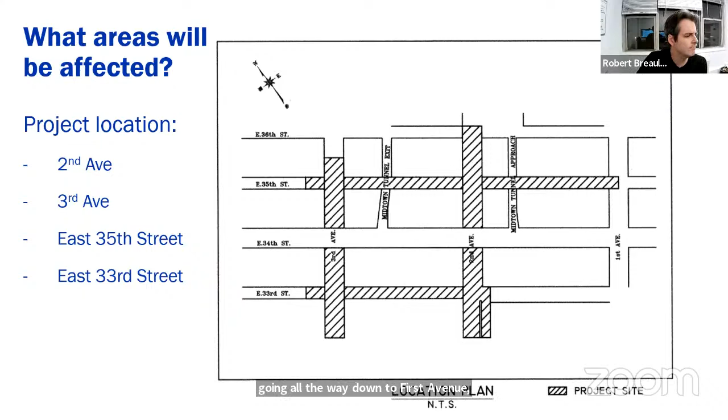All right, so how will this project benefit everyone? At the end of the job, you'll have new roadways with new fresh striping. We do extensive water main work on this project, distribution main, which is the smaller mains that service buildings, residents, and businesses, and the larger mains that take the water from the water tunnel and the shaft and then distribute it to the smaller mains, which then take the water to the buildings. We also upgrade some various private utilities along the way, electrical systems, gas systems. There's some new drainage that's been installed and will continue to be installed in the project also.

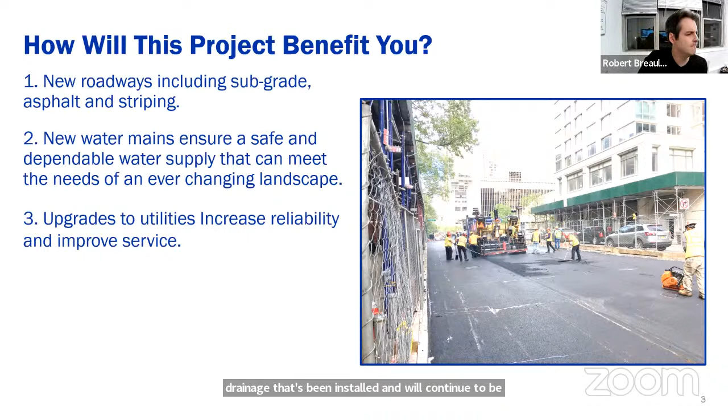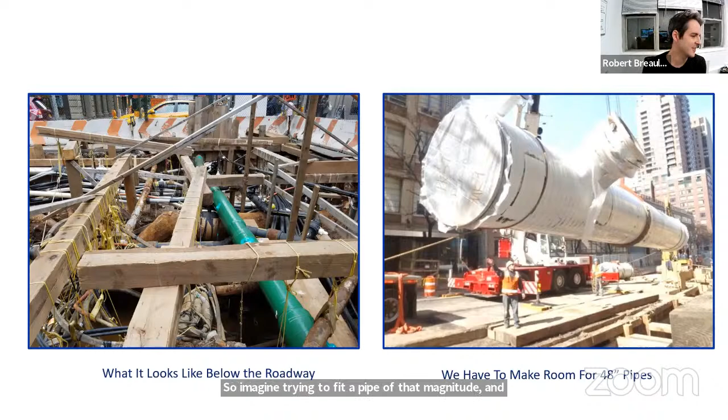All right, so this is a pretty interesting slide. The right picture is one of the largest water mains that we're going to install on the job. This picture's from another project, but it's a 48-inch diameter trunk water main. So imagine trying to fit a pipe of that magnitude into a hole that you see on the left, which is jam-packed with all types of private utilities, gas lines, electric lines, internet, fiber optics, telephone cables. So a lot goes into what we're doing out there. There's a lot of preparation, inspection, testing, and planning that goes into the final product.

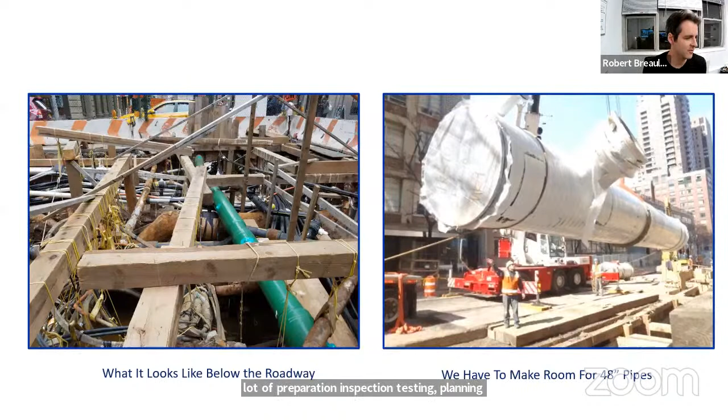All right, so how long will the job take? I'm sure this is one of the burning questions. As of right now, we anticipate the job to be done at the end of 2024. Primary reason for the job going a little longer than expected is underground utility conflicts. But through identifying the conflicts and necessary mitigation, we've developed a game plan to be able to move whatever needs to be moved out of the way to allow for the city facilities to be installed in the quickest way possible and with as little disruption to the community as possible.

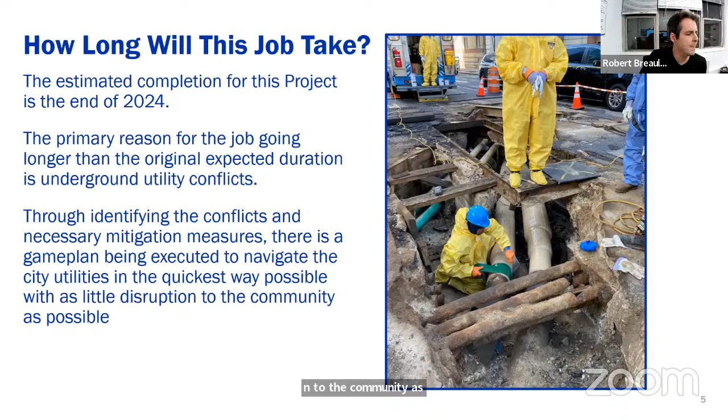I want to give everyone an update on what we're doing today, what's going on right now in the field. The most critical location of the job is East 35th Street and First Avenue. We have to install a large 48-inch water main, make a connection to an existing main running north and south at that intersection. Bringing this large pipe across the street, it has to cross many private utilities that are in the way.

Currently, we're working on a transmission main. It had a shell or encasement around it that had to be removed to create the necessary clearance for the main. We've done that. Now we're just doing some restoration work. This photo shows some retaping of the main. 95% of this work is done, and we should be done within a few weeks.

Once that's done, we're going to move to the next step, steam main relocation work. This is definitely the largest and most extensive work at this intersection. But we've discussed this with the contractor, and they're going to have one dedicated crew nonstop at this location. As soon as one thing is done, they'll jump into the next mitigation work. There's going to be no lapses in time, no delays. It's going to be continuous work at this location, which is the most efficient way to do it.

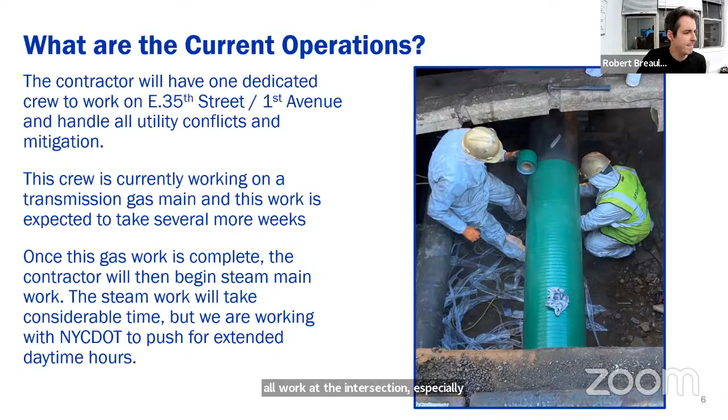Also today, we started the trunk water main, 48-inch trunk water main work on 35th Street between 1st and 2nd Avenue. As you can see in the photo on the left, we set up the MPT, maintenance and protection of traffic. We set up our work area. The barrier is separating the work zone from the traffic. There's going to be a traffic lane on the south side of the street, and all the work is going to be performed on the north side of the street.

We coordinated with various agencies to get all this work underway, including the Parks Department. The picture on the right is St. Vartan Park along 2nd Avenue at 36th Street. In order to keep handicap access to the park, we created an entryway through the 12-foot fencing. This is necessary because part of our work scope involves closing the main entrance on 35th between 2nd Avenue and the Queens Midtown Tunnel approach.

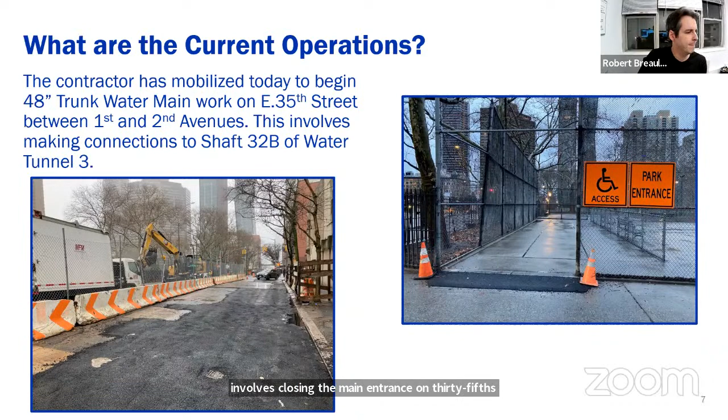We should talk about some storage areas. Luckily, in the last year or so, we've reduced the footprint of storage. Part of this was due to finishing all work on 33rd Street between 2nd and 3rd Avenue. We had a storage area on the 33rd Street northwest corner, and also one on the northeast corner of 3rd Avenue and 33rd Street. Both of those have been removed to allow for the work to be complete, so that block is completely done.

So we only really have 2 storage areas now. In fact, part of starting the trunk main work I showed in the previous slide, we had some storage on that street too, 35th Street between the tunnel approach and 2nd, and that's all gone. So there are only 2 storage areas left, 33rd Street and 2nd, and 36th Street between 1st and 2nd.

We tried to work with the contractor to minimize these impacts. 33rd Street and 2nd, they're going to keep until all major work is done. Once all the water main work is done and there's minor completion work remaining, that storage area will be gone. But we're going to most likely maintain the 36th Street storage for the duration of the project.

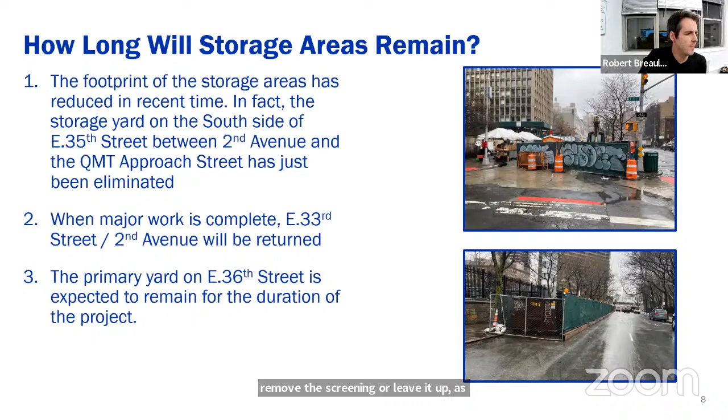All right, so tree guards. This often comes up in community comments, concerns about the tree guards, how they're being maintained, why they're in place. So tree guards need to be in place and maintained the entire project lifespan.

This is a Parks Department specification. So even if some people outside will see tree guards in a place where they haven't seen active work for months or even years and wonder why they're still up, they have to be. In short, they have to be up. We really have no say in that.

Now, on this job, the 33rd Street location that I mentioned, we worked with the contractor to remove them. They didn't need to do that because technically they're taking on responsibility should anything happen to any of the trees on that street. But we worked with them to take them down, especially since it's a street with a school. So we were able to remove those, but the remaining tree guards will have to stay up.

What we can do is make sure we're maintaining them. Unfortunately, people tend to throw garbage in them. Sometimes they get hit and they become a little disheveled and some pieces fall off. So we do work with the contractor, who routinely maintains them. So if something's in bad shape, they'll...

Reinforce it. If someone graffitis or marks them, they can paint over them. If garbage is thrown inside, they can rid the pits of garbage. They've actually even brought topsoil at times if there's some soil erosion going on inside the pit. So that's what we're going to try to do, maintain it as best as we can to keep them in tip-top shape. But we unfortunately do need to keep them in place for the duration of the project.

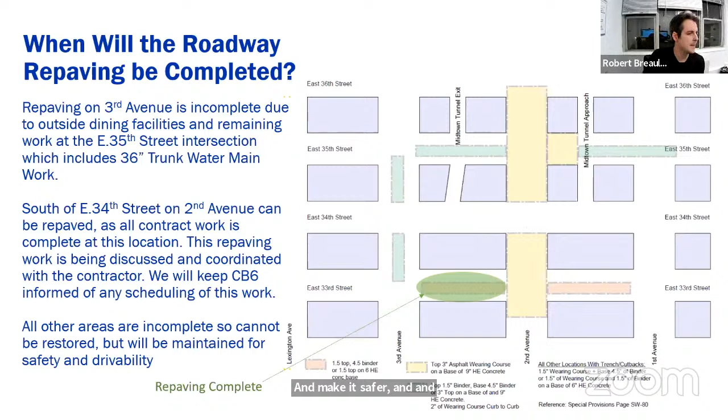Okay, so this location here, 35th Street between 2nd and 3rd. Like I had mentioned before, we still have to do a large water main, a 36-inch diameter water main on the street. But similar to First Avenue, where we have many utility conflicts, we have them here also.

So the contractor is working only on weekends, which is a little unfortunate. The permits only allow us to work because of the congestion and the tunnel exit street. We can only work on the street on weekends. So the contractor's been working weekends for a year plus, maybe two years plus at this location. It's slow going because we can only work two days a week, but we're doing everything we can to eliminate the steam conflicts to allow for the water main to be installed. We estimate now that the water main work will begin at the end of this year.

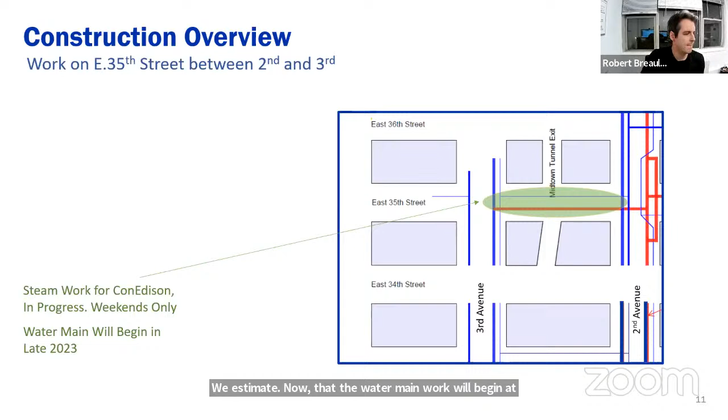All right, 35th Street between 2nd and 3rd Avenue. I showed some pictures earlier of the MPT setup and the park entrance. This is where the trunk water main work has just begun today. So they set up the zone, they set up the MPT. They're going to begin digging later this week.

This is pretty complicated work. We have a lot of connections. We have to connect to the shaft. We have many appurtenances and chambers. And not to get into too many specifics, but this is considerable work here that we estimate will take roughly six months. Now, we're not going to be able to bring the pipe all the way down to First.

We're going to come up short because we have all that mitigation work that we still need to complete. So we'll bring the pipe as far as we can, put a temporary cap on it. And then later on, when all the work is complete, the First Avenue and the lane is ready, then we'll complete the installation into First Avenue.

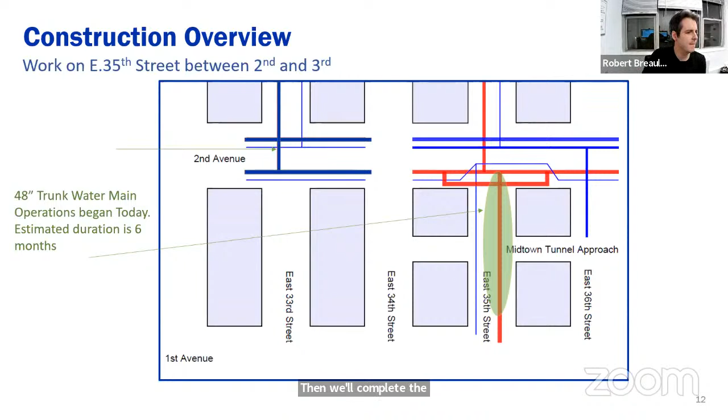And here's First Avenue, like we discussed, East 35th and First. This is where the major utility conflict work is ongoing. The transmission gas main work has only a few weeks remaining. Steam work will follow that, but there's also electric work that needs to be done here, high pressure gas work that needs to be done here, some sewer work that needs to be done here, all to allow for the large water main work to take place.

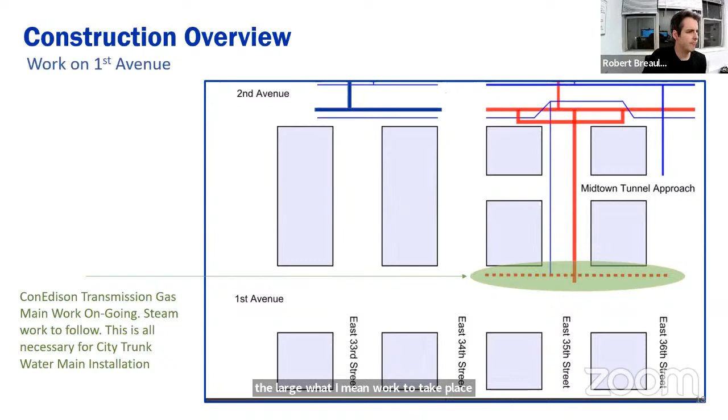All right, so community outreach. DDC's Office of Community Outreach and Notification works with community boards, business improvement districts, local businesses impacted by construction. Karen, who introduced herself earlier, is the Project CCL. She works with VRX, which is a sub to my company, Greeley and Hanson. We're the prime consultant on the job, and she's the dedicated on-site community construction liaison. And here's her information, email and phone number below.

And that's it. So see if anyone has questions. Great, thank you. And I have one, just so the committee knows, when was this project started? 2018.

My question is, if I understand correctly, you said that you're ready to repave 2nd Avenue below 34th Street. But isn't there a storage area right there at 2nd Avenue between 34th and 33rd? Yes, there's a storage area over there, yes. Can you repave around that? Or like what happened? Yeah, we might have to make adjustments to that if we're gonna do that. Okay. I mean, the reason I'm asking is that's a high volume bike lane stretch, which is already kind of a mess. And you know, I would love to see that repaved as soon as possible. I'm just sort of praying that you could go around the storage.

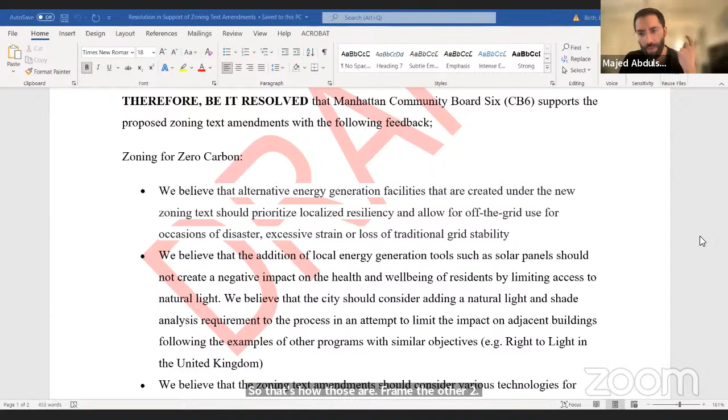The other two, I'll just mention, and others please jump in after. We talked about zoning for zero carbon. There's zoning for economic development, which is really just some changes in eligibility for what kind of stores and businesses can open.

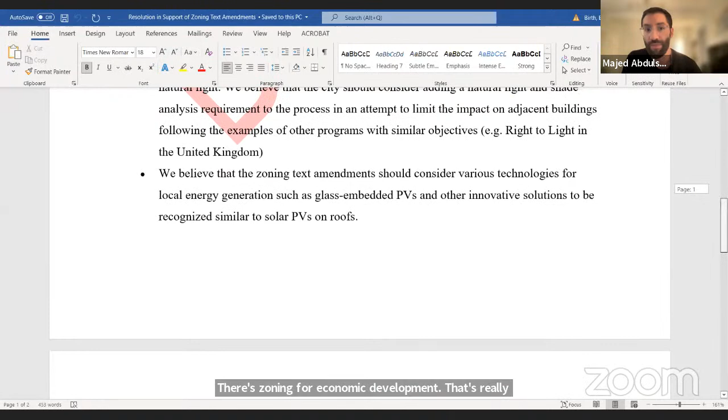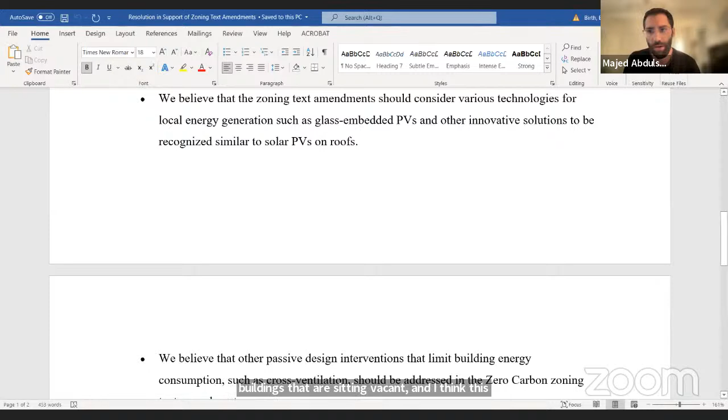And there's zoning for housing. At the heart of that is allowing, among smaller things, commercial and office buildings to transform their use to residential - not newly constructed ones, or at least that's what we're hoping. So one of our questions is, how are you making sure this is not a loophole? Living where we all live, I'm in Midtown, and there's an abundance of office buildings sitting vacant. I think this could drastically increase the number of residential units in the area, addressing the housing crisis we have. So I'll stop here, and I see Jim has a question.

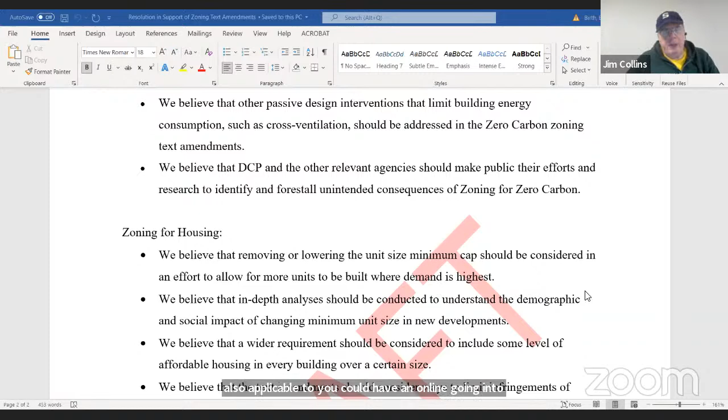Yeah, hi. I just wanted to confirm something with respect to having electricity available offline, and I wanted to ensure that was also applicable - you could have it online going into the grid as well as independent of the grid. Is that correct?

Yeah, so sorry, your voice broke up at the beginning, but from what I understand, the idea is that eventually landlords set this up on their building and can sell back to the grid. Nowhere in the zoning text does it say they are required to use it locally in case the building is for any reason disconnected from the network, and that's what we're asking about.

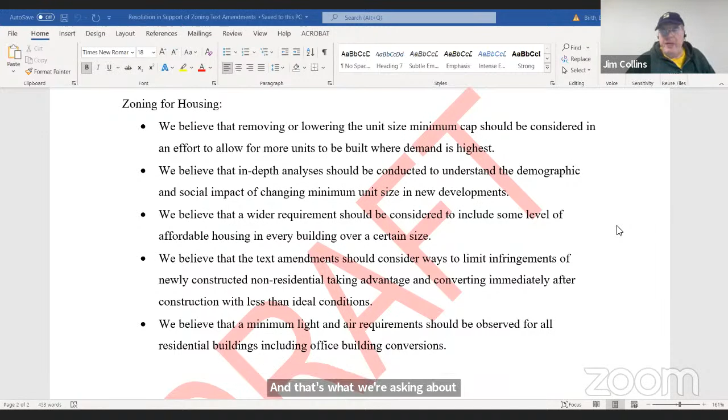Okay, so it would also operate independently then, correct? In principle, it can. It's not mandated. We hope that they add a mandate for that.

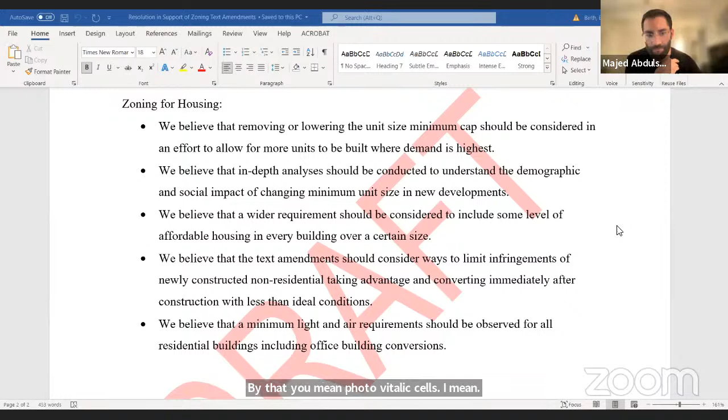Okay, and the other question was, you make reference to PV - by that you mean photovoltaic cells, I imagine? Yes, that's correct. Is that spelled out in the resolution? You might want to - I think I spelled it the first time I mentioned it, but if not, did you?

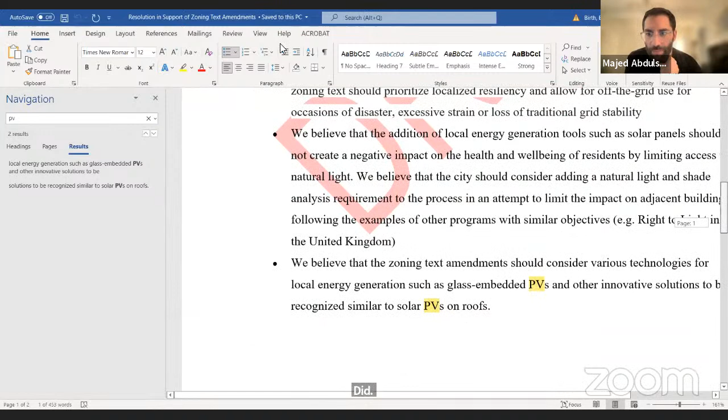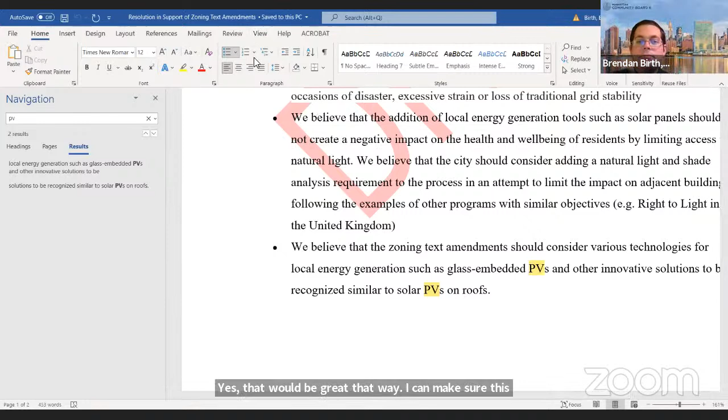Okay, go back. Did I? Okay, if not, Brendan, maybe if you're able to edit it, update that, since it doesn't impact the content. So could you say again what it is? I'll put it in the chat, actually. Yes, that would be great. That way I can make sure the stuff is correct as well. That'll stop a question at the full board.

Thank you. Susan has her hand raised.

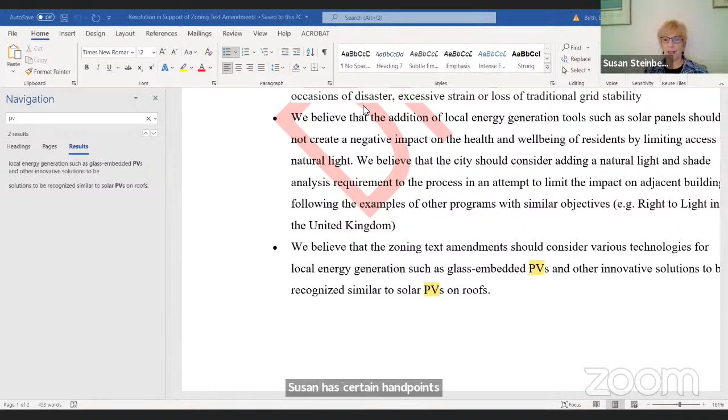Yeah, I have a couple of questions, and if my questions are annoying because I'm new, let me know and I'll shut up. But there's this huge rush to become all electrified, and I just keep thinking of these horrendous situations with climate disasters where millions of people are left without power, and I just am making that comment. I mean, I don't know what alternative we have that could be cleaner, but it just worries me.

That was number one. Number two, in terms of converting offices to residential facilities, it requires a lot of other infrastructure to really make it work - groceries, pharmacies, schools, hospitals, doctors' offices. So it's not just a matter of additional housing, it's everything that goes with it to make a neighborhood. All right, I'll shut up. No, I'll just say that's helpful.

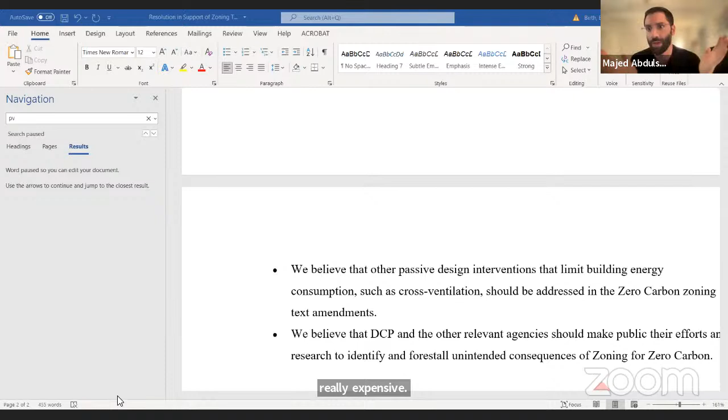Susan, to your comment about the PVs, we even added a question about the new technology for types of glass that have PVs embedded in them. Now you don't see them everywhere because they're still really expensive, but this is where a zoning text amendment makes it worth it for a developer to look at that more seriously, especially with all the glass towers we have. So we have that as one of the points.

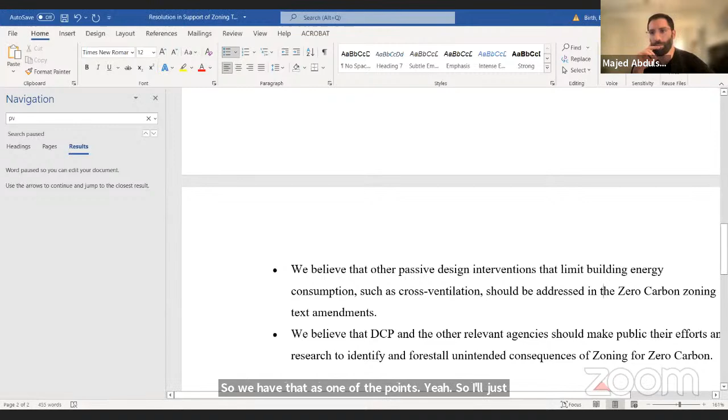Yeah, so I'll just comment on that. And I think, Susan, you're absolutely right about needing neighborhood facilities. If we do increase housing, that's really a much larger issue the city will have to address if we increase the residential density in our neighborhoods. I think there are probably lots of areas in New York that are underbuilt. And I don't know if we address that in this - the multiple dwelling, I think it's at 12 FAR, our maximum right now. So some of the things being converted would be more than 12, which definitely does increase density. I don't know if we have a position on that, if that's something we want to add into our review here.

I'll add to that, Sandy, that the one reference we did is that the zoning text amendments do not address light and air requirements for access for conversions, which, if you're building a residential building, you have very strict requirements. Office is a little different, but now if that office building becomes residential, how do they go about it? So one of our comments is also about that.

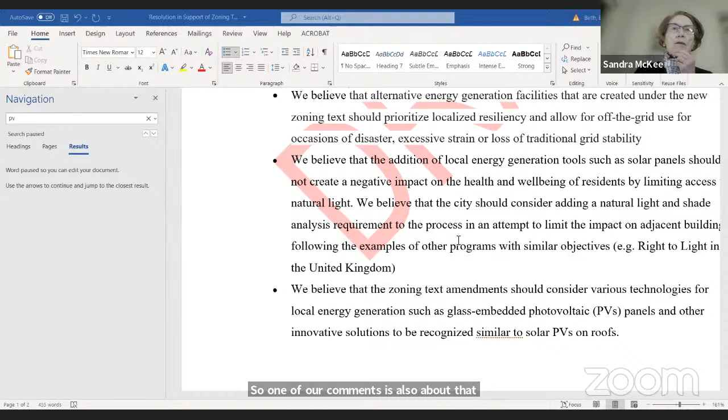Yeah, I mean, personally, I'm for maximizing density to the extent possible, especially within Midtown Manhattan. I think it's truthfully great. But just a technical question: was this emailed to us at all beforehand? I know I saw the solar one reso this afternoon, but I'm not sure if I saw this in my inbox.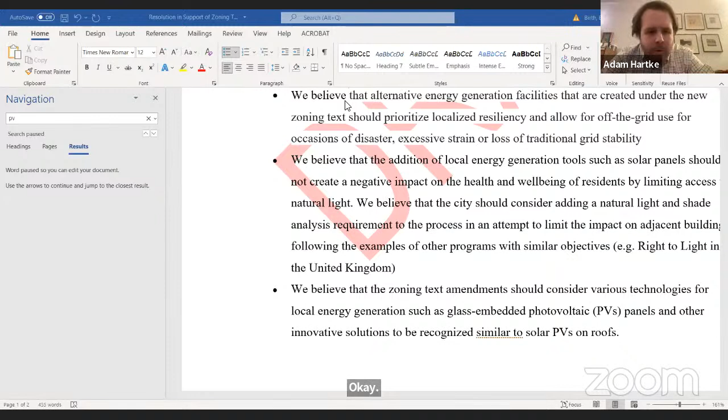No, it was not. We didn't have it in time. Would you mind? I saw the housing thing, so I've just been reading along. Would you just mind scrolling down to there? Just wanted to just read this. So thanks.

Yeah, and I'll only add that to the density point. We included a question about the size cap. So units are capped at 680 square foot minimum for new construction. There are a number of details, and that number has been brought down over the years. Now, when you can build smaller units, you can build more units because you are restricted by area, but up to a limit.

So 2 points we asked. First, has the city, specifically DCP, done any analysis on the demographic and socioeconomic impact of having smaller units and what that means? And the other was that we are in favor of removing the cap or lowering the unit size minimum cap per the findings of whatever studies they have.

I have to assume, I worked for a little bit for DCP, so I have to assume at least some analysis has been done, even if it's not made public. There's no analysis that's public that I can see, and maybe there isn't. I just missed it. If somebody knows, let me know. But that's one of the things we're asking.

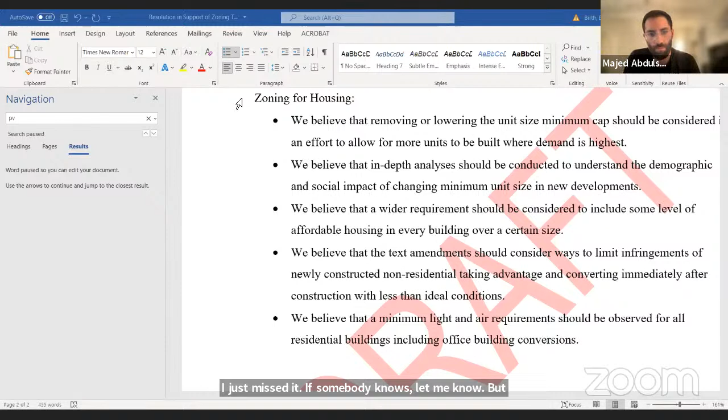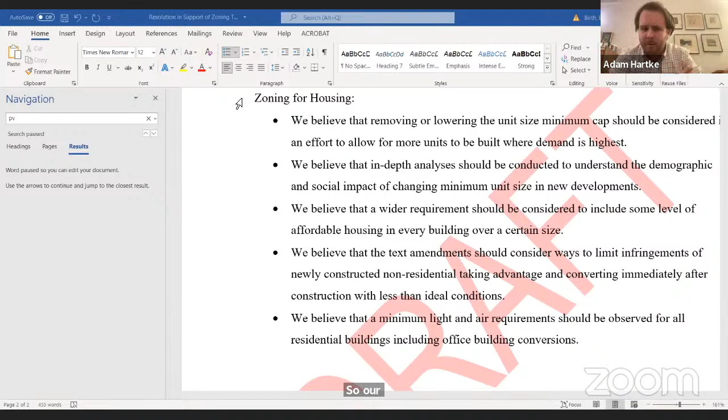Adam, do you have a? Oh yeah, sorry, I just wanted to respond to that. So are we asking that in the resolution, or are we stating that as an affirmative, like we would like to see something? Those are the first 2 points you see there. Just our belief in that. Oh, okay, sorry, mine. Yeah.

Susan? I just wondered if anybody knew how successful those really small units were in the 20s, that new building that went up. I haven't heard any reports of how that's working. And I don't know that we have any feedback. I mean, they're the smallest units in the city. I believe it was especially built for our neighborhood.

Brendan, do you know if we have any feedback from individuals there? I'm not sure how the structure of the building works, who runs it. I have not heard anything myself. But it's a good point, Susan. We probably should reach out and try to find out more about how that building is working. And I know there was a lot of discussion at the time about who is actually going to use those units - would it be students? Who would actually gravitate to that space? So yes, we probably should try and find that out. Thank you.

Do we have any other questions? We are doing this as a resolution, but partly city planning has said that anyone can use their website and put questions into it. They do have, on their site, a request for feedback. So we tried to do this officially from our neighborhood, but certainly individuals can go and add their own comments. I know we put something out in the newsletter. Brendan, did we receive any feedback from community members? No. Okay.

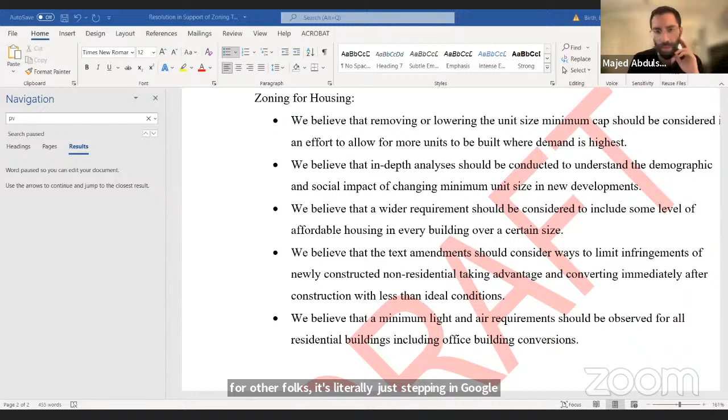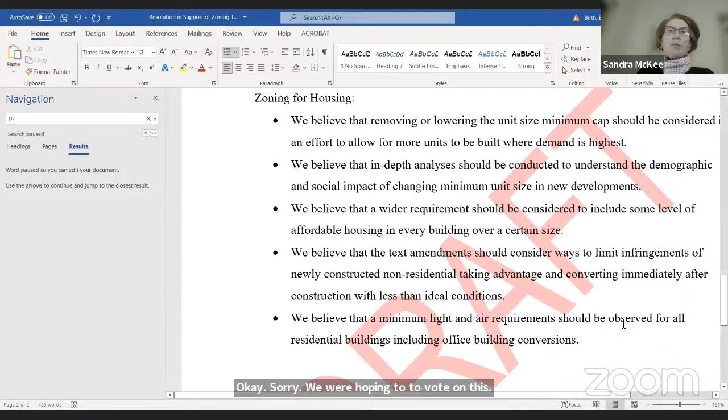And so for new community members, if you just type City of Yes and DCP, that would be the first link you get. I'm going to put it in the chat, but just mentioning for other folks, it's literally just typing in Google City of Yes - DCP stands for Department of City Planning. And I know we were hoping, right? Sorry, I was muted. We were hoping to vote on this if we feel comfortable bringing this resolution to the full board.

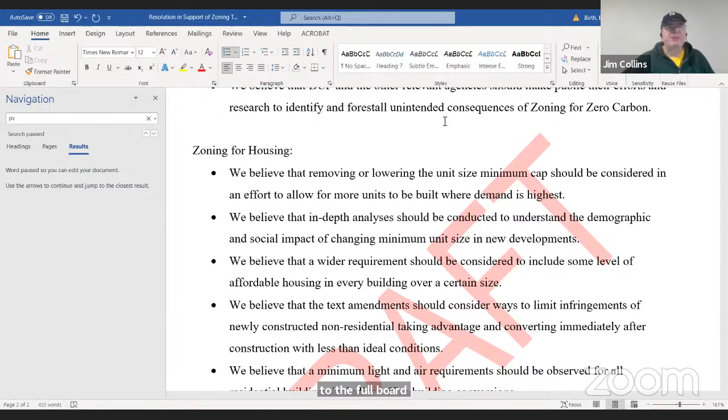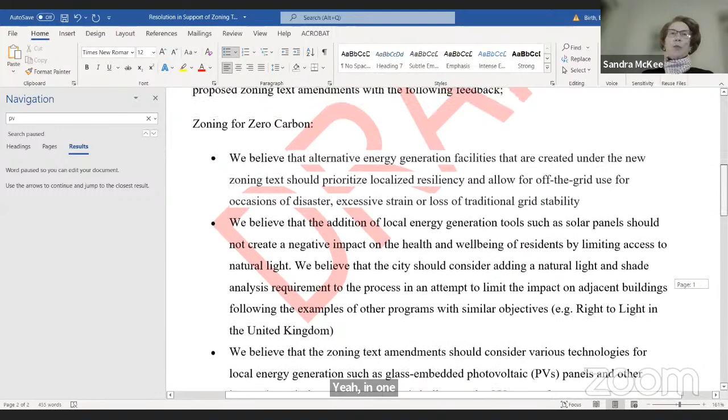Is there an exigent time requirement on this? I'm just seeing this in bits and pieces, and I'm curious to read the whole thing in one sitting. Well, I think we do want to probably present at the next full board, and certainly we would have time for people to look at it and make any comments. I think this is the third month we've been talking about it, so we would like to pull it together. No, I'm just talking about the reso itself. Right, we would like to present it to full board. Yeah.

I'm just thinking perhaps we can review it, then caucus, do a brief caucus, and then vote on it. I don't really feel it's appropriate to vote myself because I haven't read through the thing yet. Unfortunately, we haven't really worked out how to caucus.

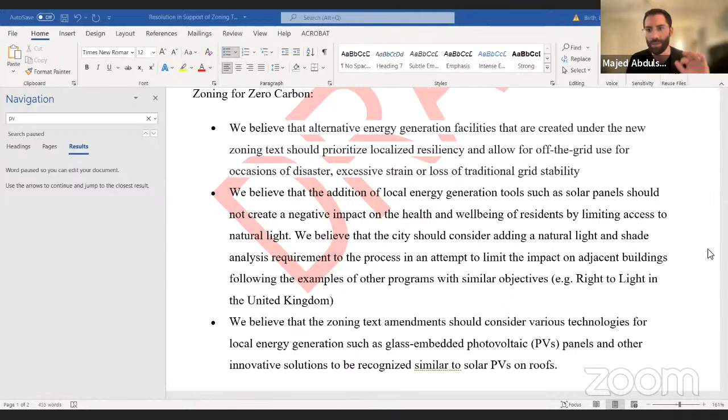If I can, the wording here is just reworked and put in the format that Sandra suggested, but that's the same document we shared at the last committee meeting. So I believe everybody had access to this already in the form of a Google Doc, but that was a little bit more messy. So this is just a cleaned up version of it.

Although, sorry Jim, I should have worked on this earlier, so you all should have gotten it. No, everybody here is a volunteer, and you do what you can. Everybody except Brendan, so we can all beat up on Brendan. No, don't worry about that. Let me take a look at it and see what I can do with it.

Susan noted that it's hard to see on the screen here, you don't see the full thing. And then Larry, I think you had your hand raised.

It goes to the mechanics. Brendan, is there any way that you could slowly scroll down from the top of this and just give us a chance to confirm that there's nothing that's been slipped in that we didn't expect?

If I may suggest, perhaps Brendan could email the committee the revised resolution. We can take a look at it while Sandra is giving her chair's report, and then circle back and take a vote on it. Would that work? Because we can all read it in the interim.

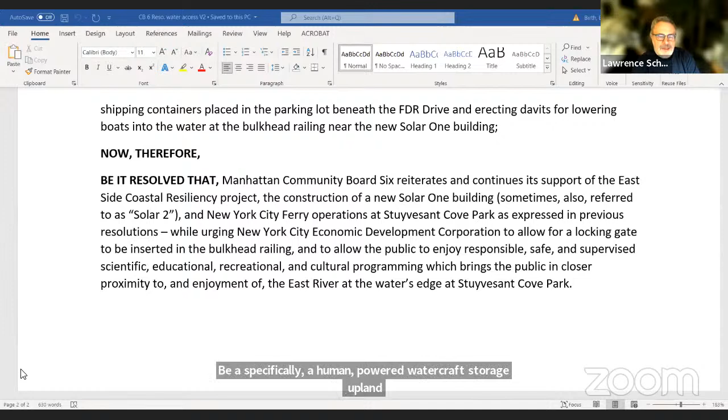There are two points: one, there's currently no gate, and that's an oversight that needs to be rectified to allow approach to the water or the sandy beach. Second, if there's going to be human-powered watercraft storage upland, there needs to be some mechanism to bring the watercraft down to the water level.

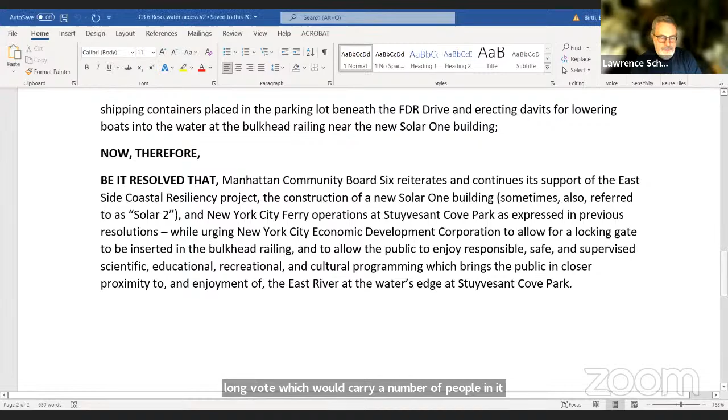One suggestion made by an advocacy group was that the boats used would be something called a Whitehall gig, a longboat that carries a number of people. It would be lowered down via davits, as you see on an ocean liner lowering lifeboats suspended above.

But that's not the only way it could be done. There was an earlier proposal for an eco dock down at water level, a floating dock with a ramp up to the railing, and again a gate through which you might carry boats down. I didn't mention that before, but it could be added if anyone wants.

Also, it's important for people to know we've been advocating for taking the space under the FDR for public use rather than parking, and some of these suggestions could be accommodated within that.

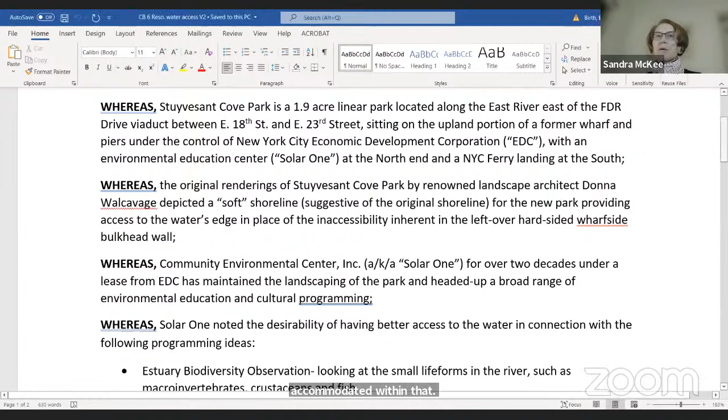Are there any questions for Larry on this? Really, it's a very simple ask: we want a gate and a way to get down to the water, for lots of different reasons, practical as well as educational.

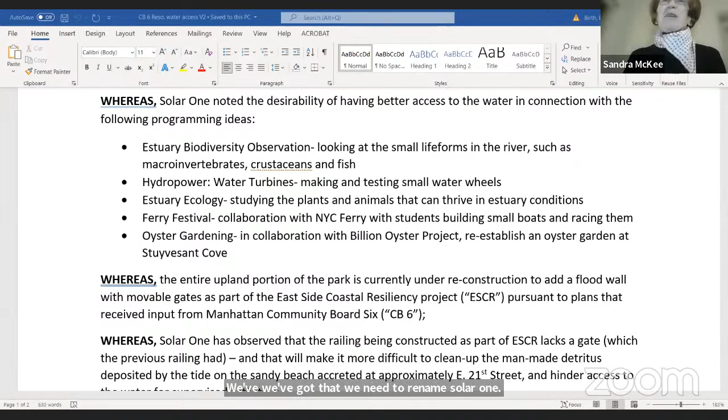So what we see here is the name of the entity - was it in the first whereas? That's where that change goes, I believe. No, we can just send that to the board office after. Third whereas? I can't see. We can change it later, Larry, don't worry.

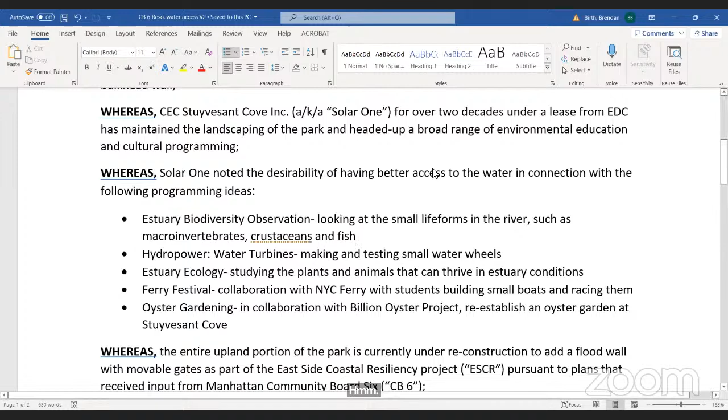So exactly when the groundbreaking would happen, I'd have to check with the construction management team and the folks at EDC, but I will certainly give everyone plenty of advance notice. And we're glad it's happening - that's all, we just want to see it on track.

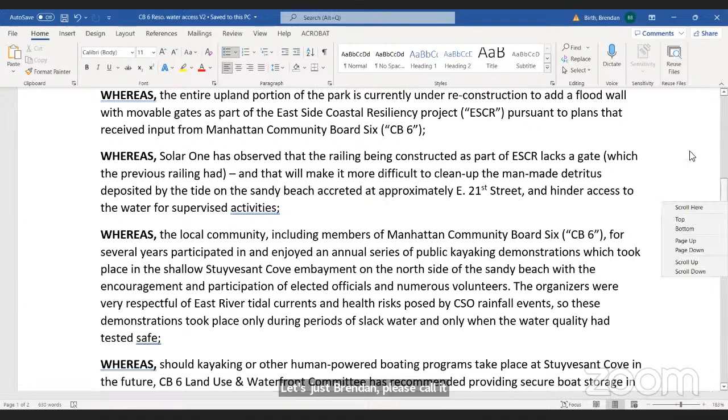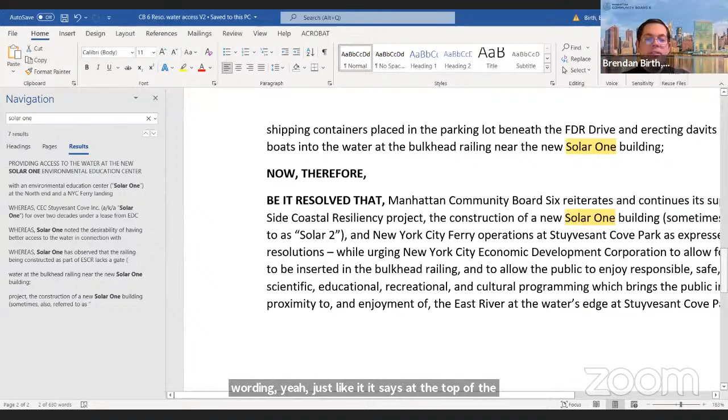Thank you. So Brendan, I think - go ahead, Dean. Probably for the sake of simplicity, let's just call it Solar One Environmental Education Center wherever that wording appears, just like it says at the top of the resolution. I think that's fine - so just have it say Solar One Environmental Education Center instead of just Solar One? No, Solar One is still the entity that will manage all of these things.

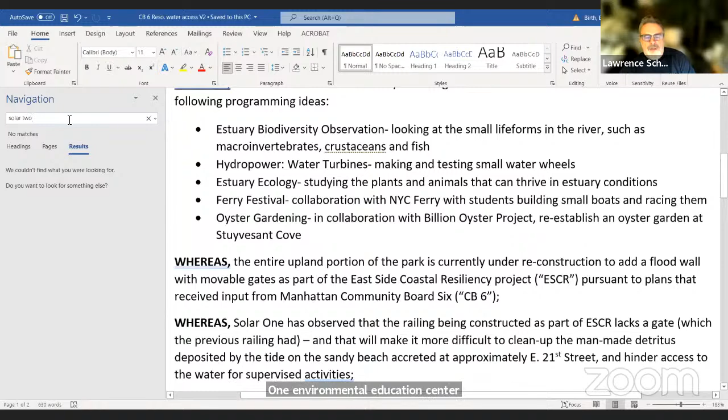But if there's a place where it's referred to as Solar 2, we can just change it to Solar 1 Environmental Education Center. Well, the only place that currently has that is in the resolved section. If you can scroll down to the resolved. So yeah, let's just change that. Great, better? Yes, thank you.

Okay, we can vote now then, Brendan. I think we're set. Yes, there is a motion on the floor currently. So when I call your name, please say whether you are in favor, opposed, abstain, or abstain for cause.

Majed Abdul Samad, in favor. Jim Collins, in favor. Adam Harkey, in favor. Sandra McKee, in favor. Larry Shire, in favor. Sandro is not present. Jonathan D'Errico, in favor. Rich Mintz, in favor. Susan Steinberg, in favor. Gabe Terzo, in favor. Brian Van Nieuwenhoven, in favor. With 10 in favor, nobody opposed, abstaining, or abstaining for cause, the resolution passes.

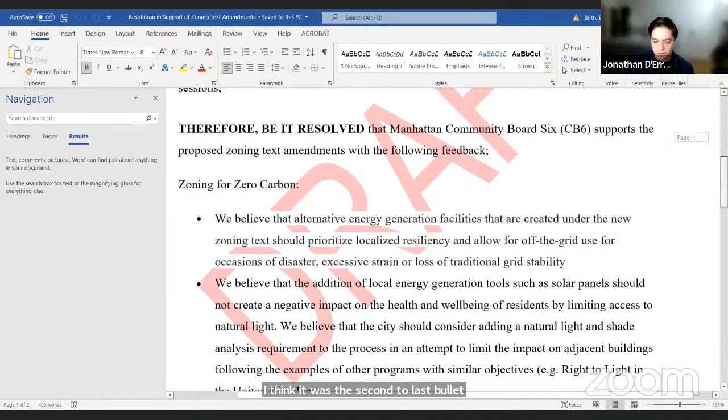So, starting with the word missing, Brendan, if you just highlight that. Where was it again, John? Oh, further down, I think it was the second to last bullet under zoning for housing on the final page. And I think there might be a missing noun after newly constructed non-residential. Non-residential developments. Yes, thank you for catching that. Under non-residential developments. Yes.

And to your second question, Jonathan, that was George Janes, who attended 2 of our committee meetings and gave really great presentations, which I believe are now on our website. But they've been circulated, and I'm happy also to forward again. They're great because he goes through step by step, sharing what he believes are the opportunities and where some areas that helped us understand what's relevant for us. So yeah, even the recordings, if you go back and watch, I highly recommend it. Just some background listen while you have dinner. I'll check them out. Thank you so much.

Yeah, and he's actually a planner that is on retainer with us, so he helps us deal with a lot of these planning issues. He's got a lot of knowledge. Works with many community boards throughout the city. I think Dave, your hand was up next.

Yeah, thank you. So also regarding the second to last bullet point, I'm not entirely sure why we should care if this happens. If somebody, quote unquote, why are we terribly concerned about the age of a building that converts? One, that seems like an incredibly capital intensive way to sneakily build housing, and 2, if that does happen, great, more housing.

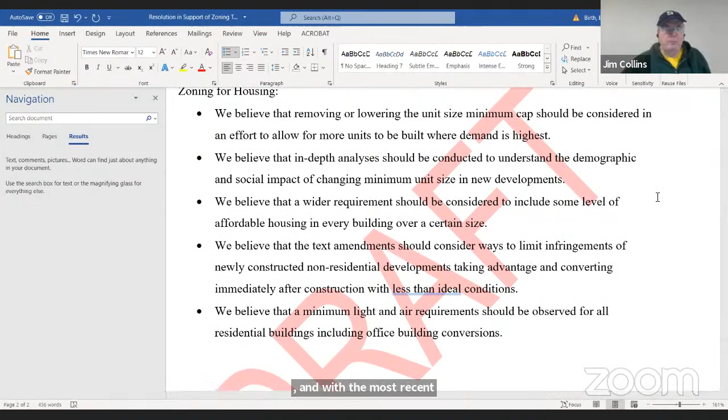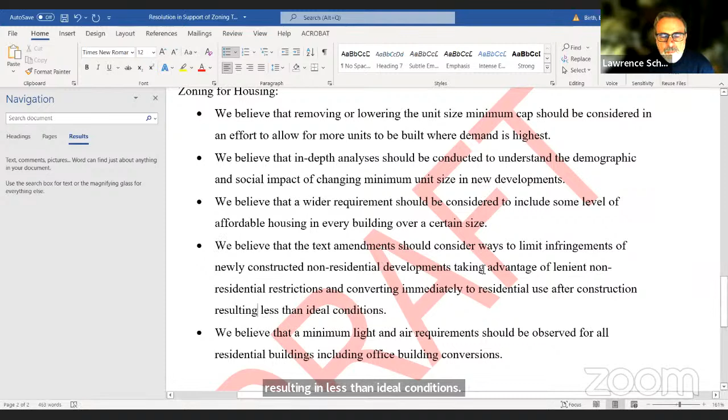Okay, just continuing with what Jonathan started and with the most recent comments, changing this next to last bullet here. It says non-residential developments, and there are a couple of omissions I'd like to fill in. Taking advantage of, I'll suggest some language, lenient non-residential restrictions, and then continuing, converting immediately to residential use, and instead of 'with less than ideal conditions,' resulting in less than ideal conditions. That's it for that item.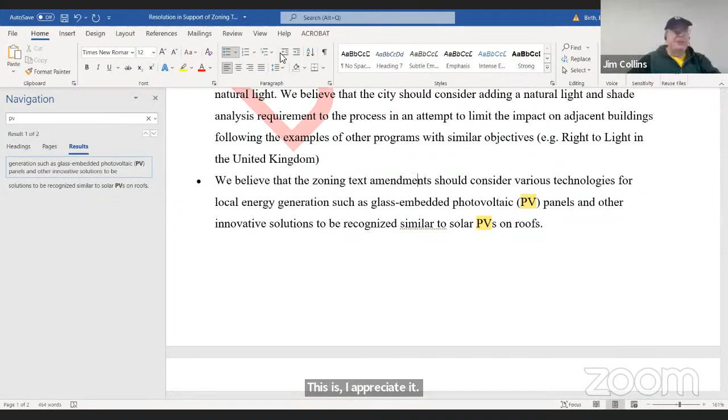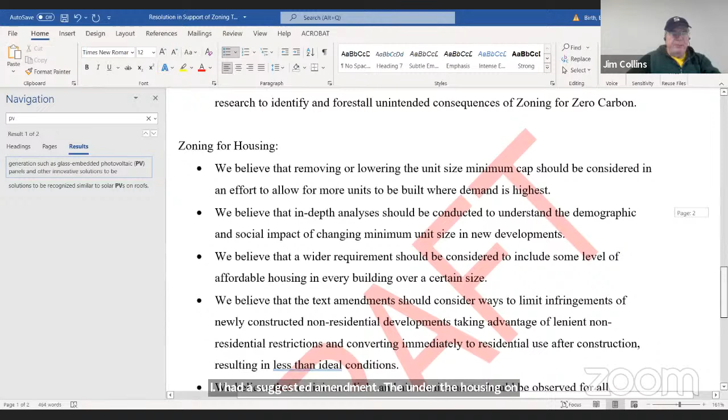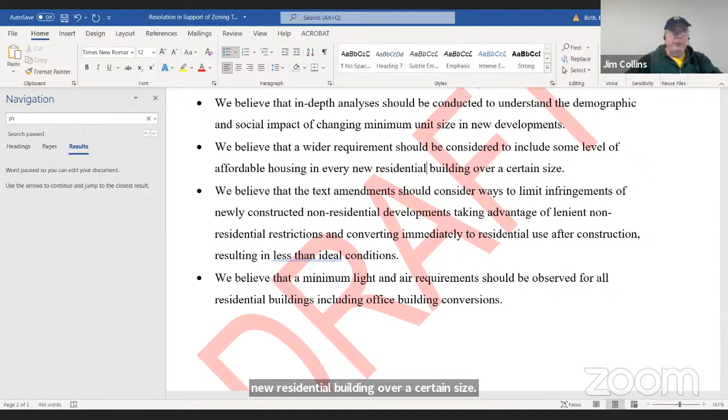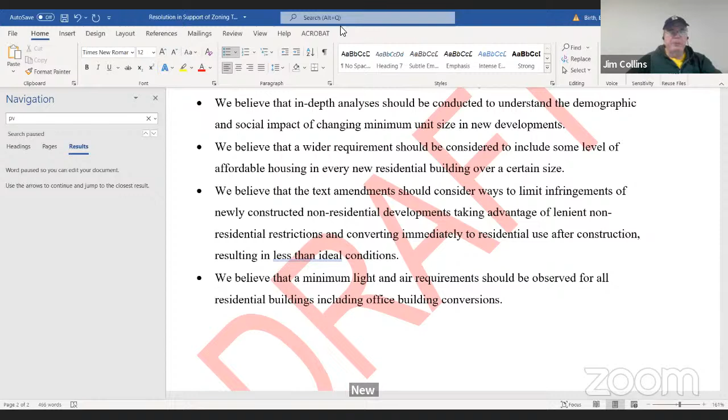Yeah, I had a suggested amendment. Under the housing, on the third bullet point, I think that should read affordable housing: we believe that a wider requirement should be considered to include some level of affordable housing in every new residential building over a certain size. You can't force someone to create affordable housing in a building that's already built — it's a takings, it's illegal. It's just that in every new residential building. Means also converted — new or converted, yeah. If you took one of the office towers and converted it to residential. So I would just say new residential building.

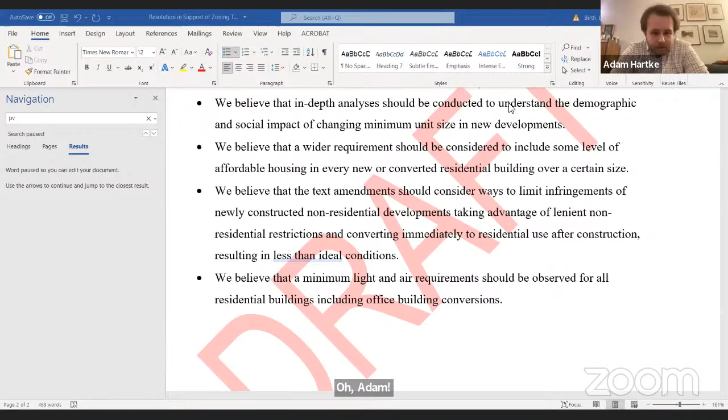Okay. Are we ready to vote? Do we feel comfortable with this? Oh, Adam — call to question. Second. Thank you, thank you. Seconded by Susan. Okay.

So when I call your name, please say whether you are in favor, oppose, abstain, or abstain for cause. Majed Abdul Samad — in favor. Jim Collins — in favor. Adam Hartke — in favor. Sandy McKee — in favor. Larry Shire — in favor. Jonathan Dorico — in favor. Rich Mintz — in favor. Susan Steinberg — in favor. Gabe Terzo — in favor. Brian Van Nieuwenhoven — in favor. With 10 in favor, nobody opposed, abstaining, or abstaining for cause, the resolution unanimously passes.